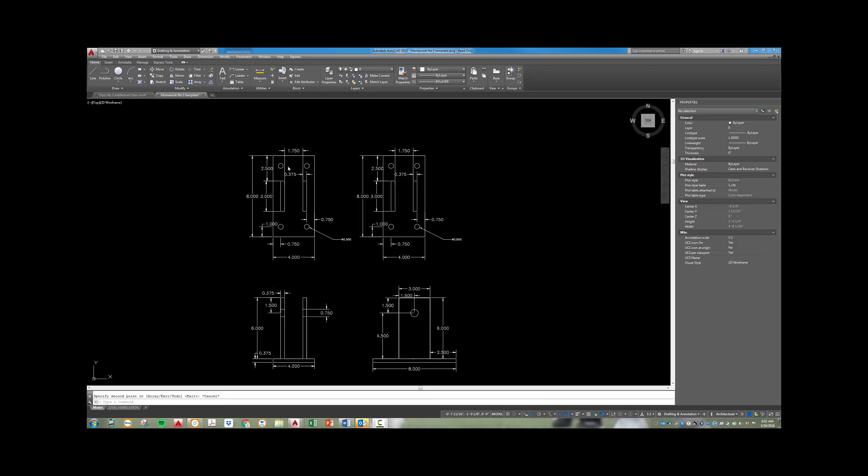Jay, I have your homework here, homework number 2, I believe. You've drawn these 3 items. I copied this one over to the right here. I'm going to erase some stuff here just to...

Show you how to do some dimensioning to make it a little bit quicker and easy on you. The big thing here is this stuff needs to be lined up. You can't have your dimensions that close there. You're hitting there, your zeros kind of lay over your line there. So all these things just need to be cleaned up a bit.

Best way to do that in AutoCAD is grips. So if you pick on a dimension, or anything for that matter, these blue squares pop up, they're grips. If they're blue, that means they're just sitting there stagnant. If you click on them with your pick button, they become hot and they turn red.

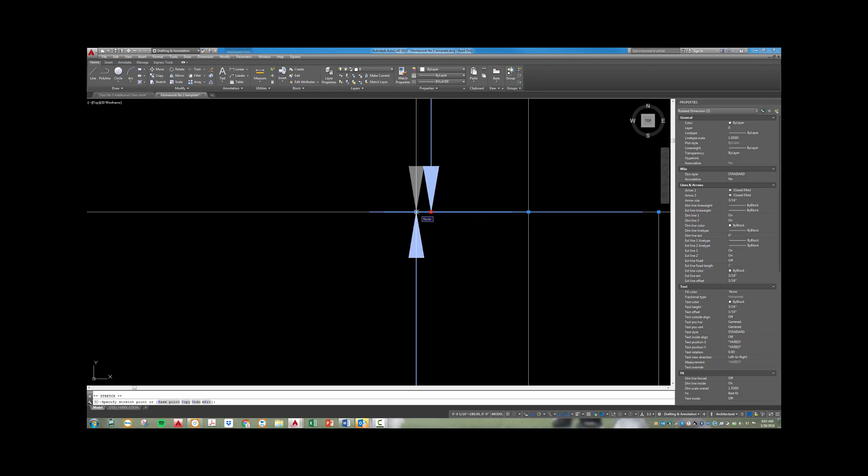All I did was come in here, a crossing command to pick these 2, or I could just pick them individually, pick. I get those 2 blue squares, I make this one hot, I drag it to here. As soon as it gets close, it's going to snap onto that other one. Now they're both hot. I can pick them both because they're laying right over each other with the pick button, move it out, pick. They're perfectly lined up.

This guy here, I'm going to pick this grip right here to make it hot. I'm actually going to come up here and pick on this line to get it to line up dead perfect. Then I'm going to hover over this grip here, and it says move with leader.

Now right now you see how that line's at an angle coming off? If I hit the F8 button and throw ortho on, that's going to snap that guy vertical. And I pick my pick button.

Typically when you have your dimensions, you're either going to the quad point or the center point. I'm just going to hit on this grip, make it hot with my pick button, come over here, snap to the quad point of that circle. So now this dimension's lined up perfect, and it looks good right there.

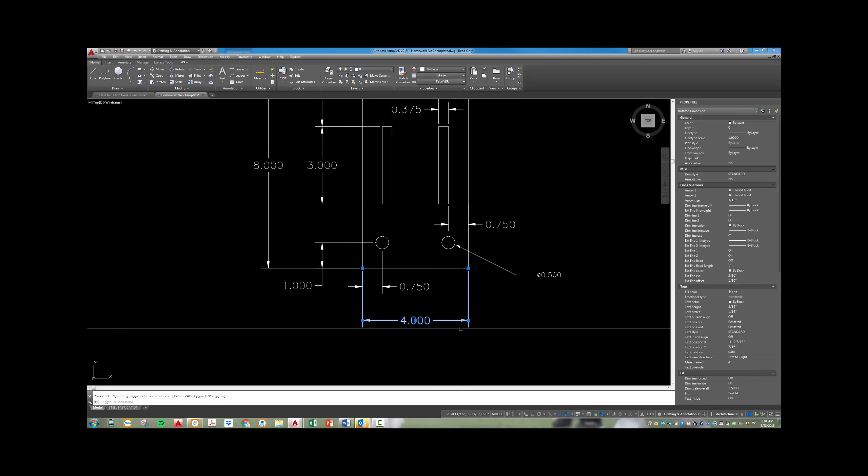Same thing with this guy. He should be going all the way up to the quad point. Just from a visual point of view, it makes it look a little bit cleaner. Your 4's kind of off into space, so I just pick it, grab the grip, drag on up, boom, looks good. This guy here, I'd probably drag him up a little just to center him between this line and this circle.

This here, same thing, just grab the grip, hot, make this one hot, pick, come to the right. I hit ortho on again.

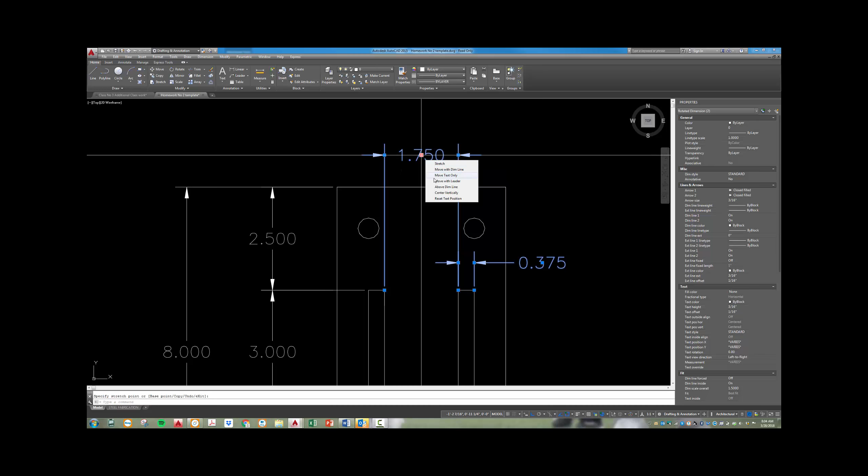Up here, do this. This guy here, if I just hover over the middle, gives me some options, and I can put it above the dimension line. It's not typical that you'll have one in the middle and one above on the same drawing.

So I'm just going to hover over that again. I'm going to reset the text position at the bottom. I'm going to grab this grip, pick, drag to the right, make it look kind of pretty. So that's all cleaned up right there.

I'm not going to deal with this right now. That's a whole different thing.

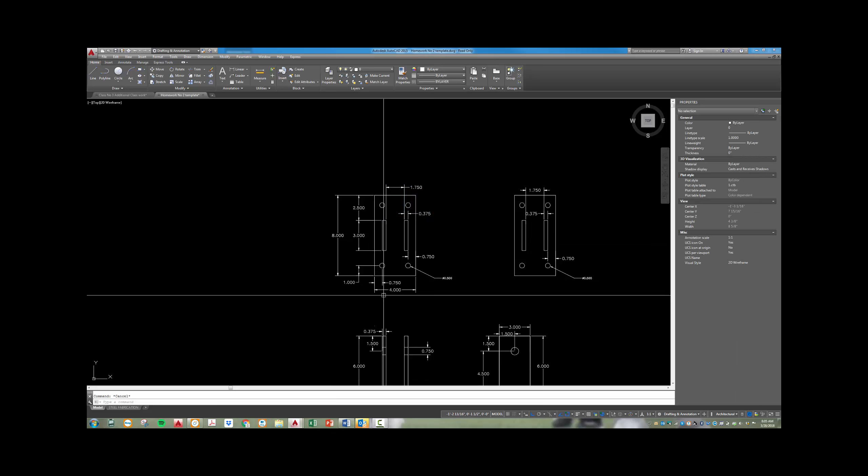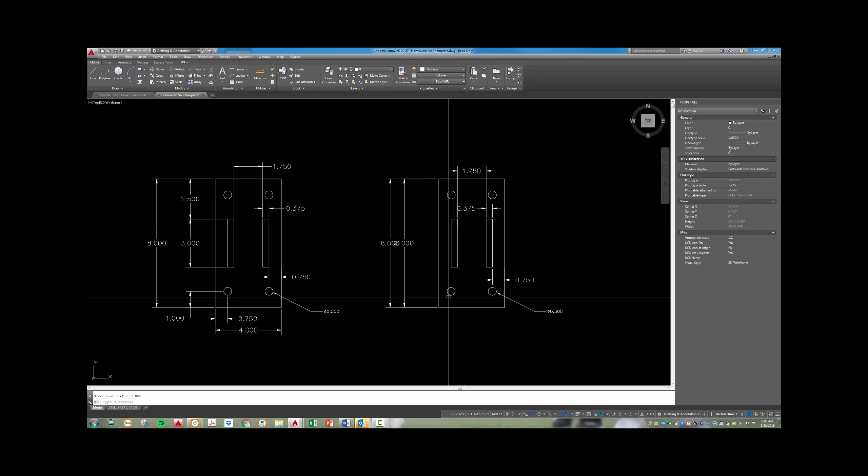So if I do a dimension, linear, normally you pick 2 points, endpoint, endpoint. Because you have your left hand on the keyboard to make yourself fast, you pick linear again. If you hit the space bar, now it tells you to pick an object, and now I can just pick this one line. It's a lot easier and a lot faster for me to just pick a line than to go up here and pick a point and go down here and pick a point. So again, linear, space bar, pick, boom.

I'll erase that one for now. Same thing, I'm going to pick my linear command. I'm going to go from here to the quad point, whoop, endpoint to the quad point.

Click on it, hover over it, move with leader, F8, boom. I'm going to move it in just a little bit.

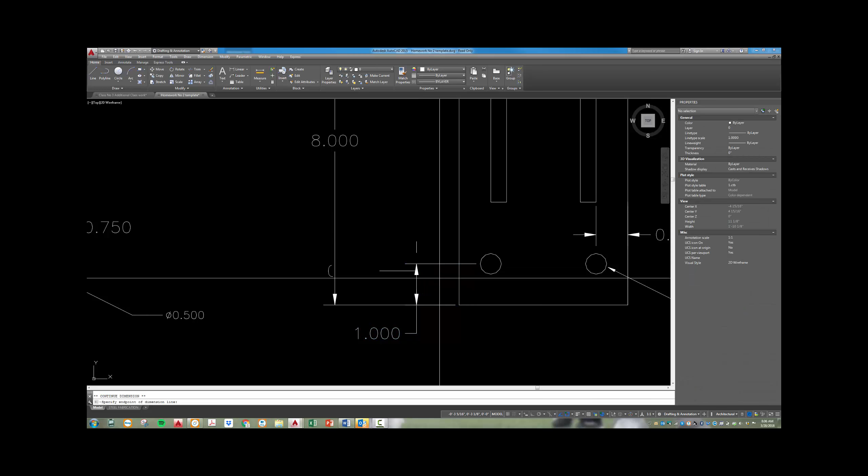Now I'm going to hover over this square, and it says continue dimension is one of the options, the second option down. I just drag my mouse over it, pick, and now as I start to go up, I pick that intersection, pick. I pick that intersection, pick.

Something's definitely off here. I don't know what I did wrong. Let's figure that out. Oh yeah, I missed the corner. Highlight them, grab the grip, drag it to the corner.

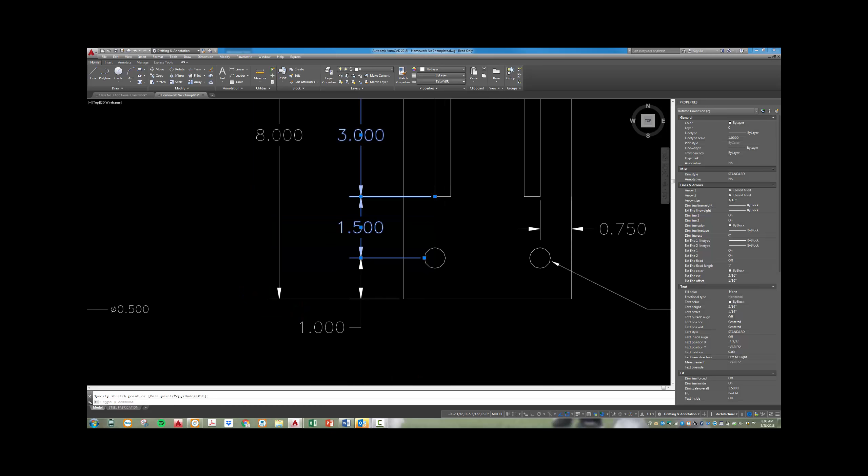But that continue thing allowed all these to be done quickly, but they're all dead perfect in alignment. I pick this one here, hover over the grip, move with leader, boom. So those are some dimension things to make it a little bit cleaner, easier, faster, better.